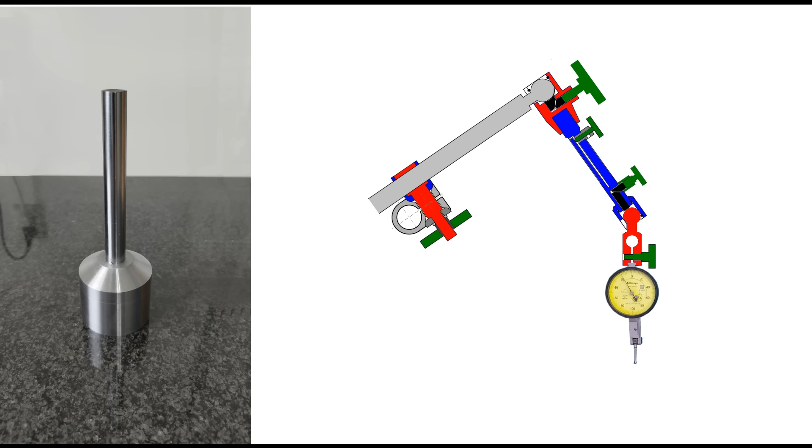In this video, I build the adjustable arms of the stand, using a human arm as an example. The shoulder, elbow, forearm and wrist are designed, calculated and made in this video. I hope you enjoy watching it and find inspiration in it.

This is the design for the shoulder joint. I'm going to make it from silver steel so that I can harden it later for extra strength and wear resistance. A threaded bolt extends through the two clamping blocks so that the block wings can be pulled together. I will later regret that this bolt fits into the blocks without any play.

My tiny tabletop bandsaw comes in so handy here. The machine has no trouble with this 40mm thick steel bar and neatly cuts smooth and straight slices and blocks. If you want to know more about this machine, watch the series about its construction on this channel.

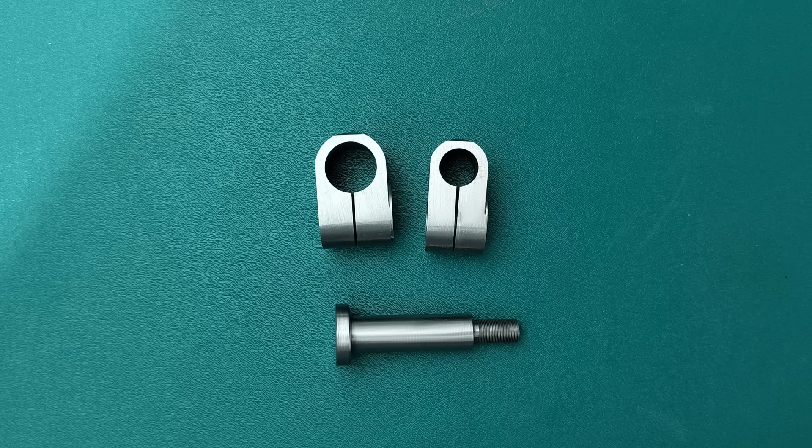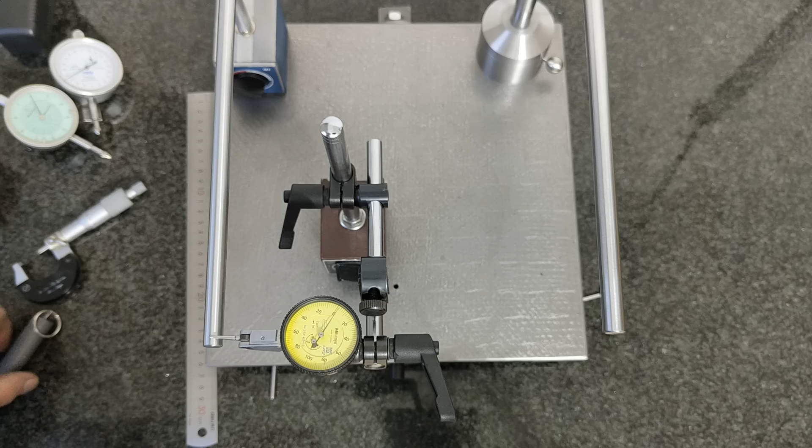And the parts for the shoulder, except for the large knob that I make off camera, are now ready. Let's first test whether this design is sufficiently rigid and allows smooth shoulder movement. This is the commercially available magnet stand. The deflection under the weight of 1/4 kilo is 400 micrometers.

And the deflection in my construction turns out to be 134 micrometers. A lot less, but I am anything but satisfied with this. The knob needs to be tightened much tighter than I expected with such a fine thread, and the flexibility of the shoulder joint is too great.

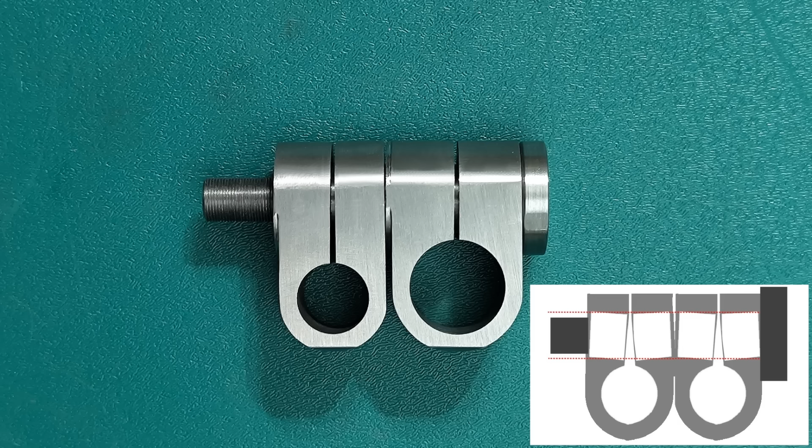Some thinking led me to realize that I had made a design error. The bolt fits through both clamps without any play, which means that the deformation in the clamps that will always occur when tightening will cause these clamps to become stuck around that bolt. I don't want to solve it simply by reducing the diameter of the bolt, because then I introduce unwanted play. I'm going to make a better shoulder joint.

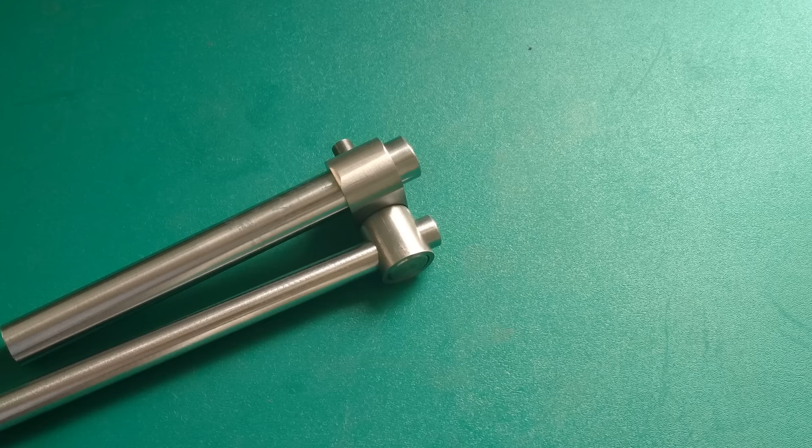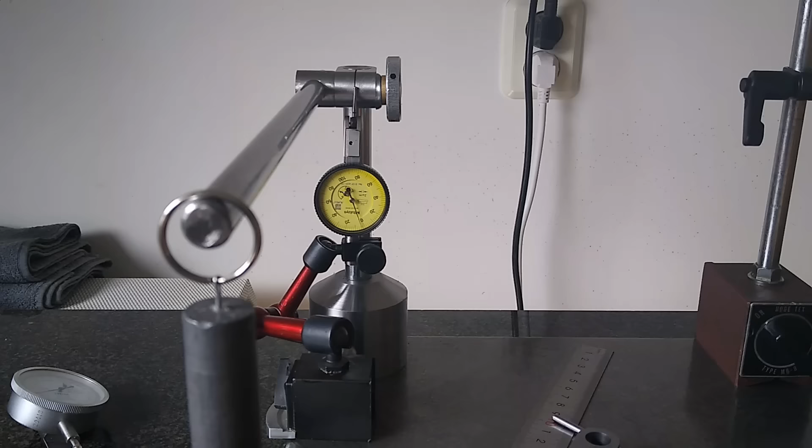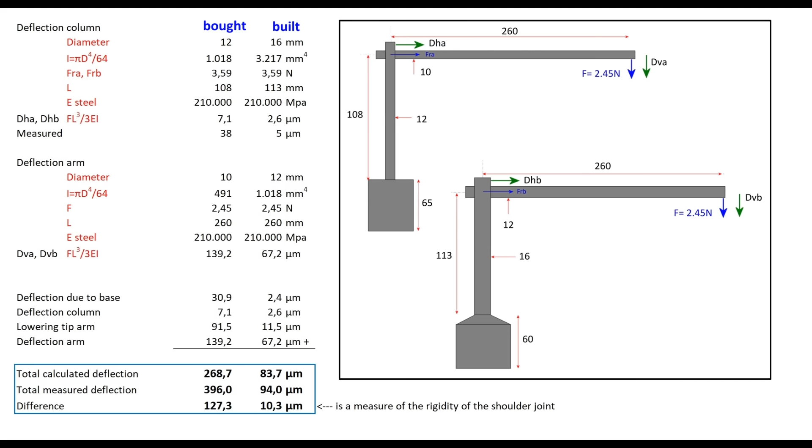This is much better. Not only has the deflection been reduced to 94 microns, a slight tightening of the knob is sufficient to properly lock the shoulder joint. Of course, I also did some calculations here, and that led to an estimate of the flexibility of that joint. At just over 10 microns, this is much better than the 127 microns in the commercial model.

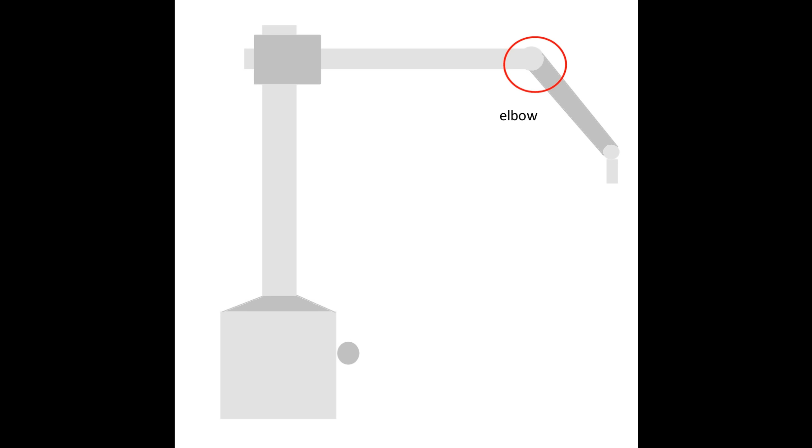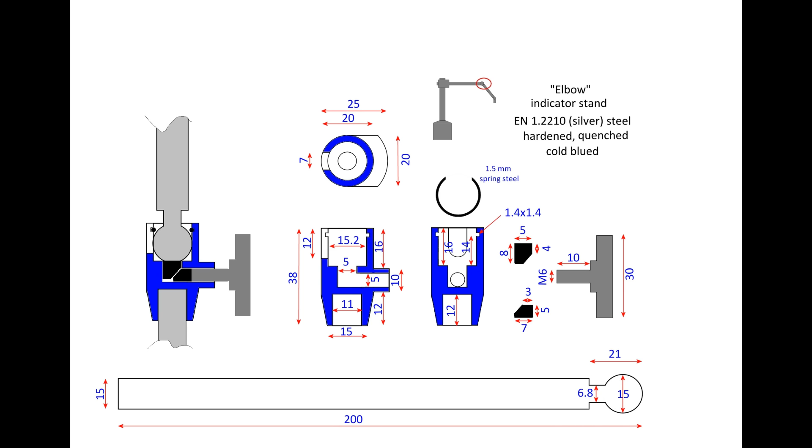For the design of the elbow, I used the commonly used ball head. By tightening a bolt, 2 clamping wedges are pressed very tightly against the hardened head, which in turn becomes clamped in a ring.

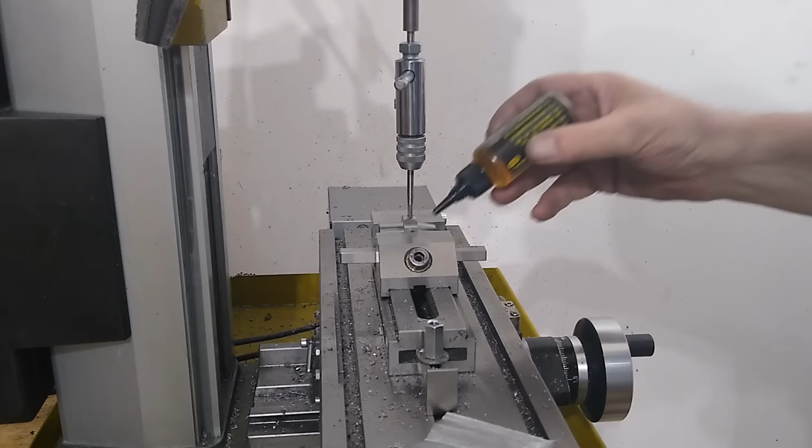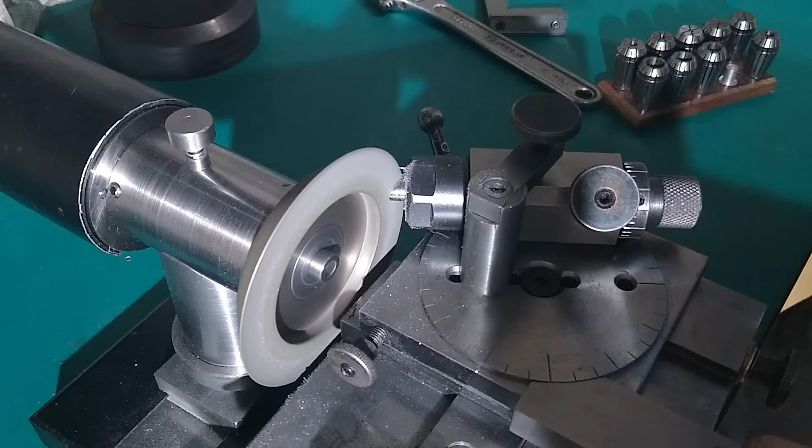On my to-do list, design and make a decent radius cutter tool. This is just junk. If you want to know more about this small grinding machine, see the series A Tiny Tool Grinder.

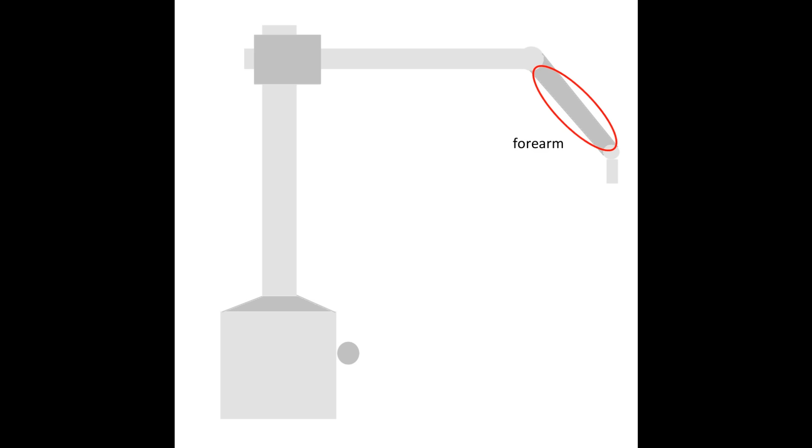To enable smooth fine-tuning, I first build a forearm. To maintain the biological analogy, I call the parts of the arm the radius and ulna. The two are pushed apart by a fine pitch screw. If both parts had the same cross-section, they would both deviate from each other by the same amount.

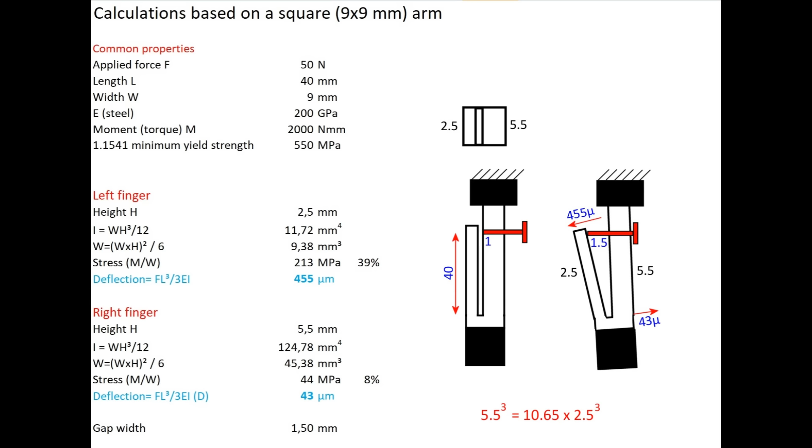By making one part slightly thicker than the other part, and allowing only this thick part to connect the elbow and wrist, I get the desired weakening of the displacement by about a factor of 10.

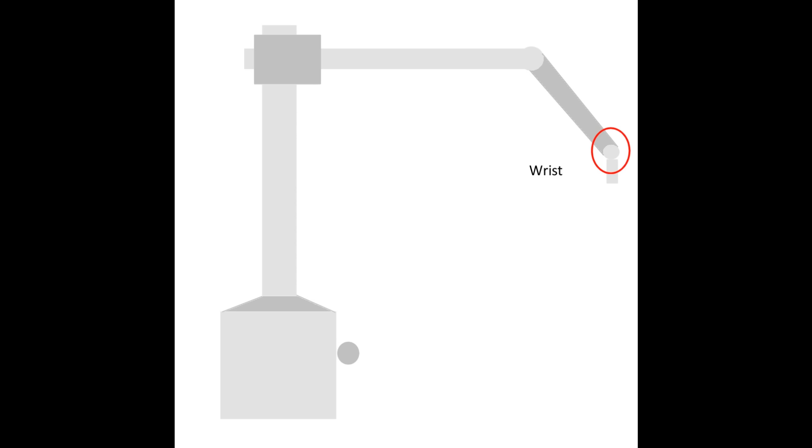For the wrist, I use the same principle as for the elbow, a ball head with a clamping device.

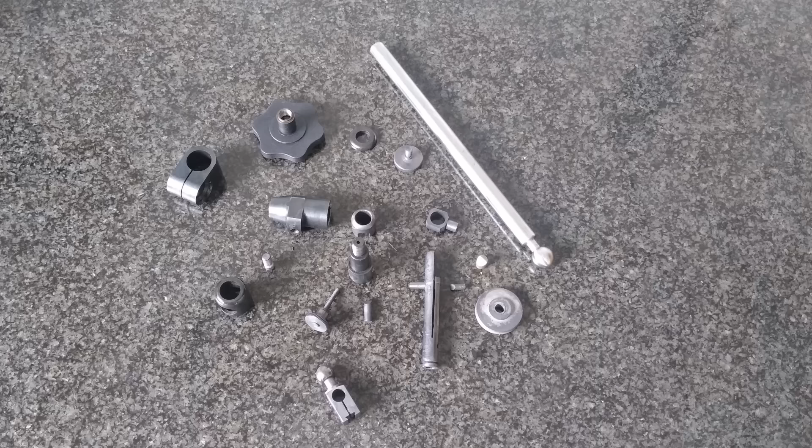All parts are finished. Most of it is made of silver steel and can soon be hardened and tempered, but some parts are made of mild steel. I will carburize, also known as case hardening, these parts in my electric oven. I just use aquarium carbon and sodium carbonate, which works well, clean and easy.

If you would like to know more about this and the hardness tester I built, view this series How Hard Can It Be? Here, under the microscope, the small pit that the tester's diamond has pressed into the material is visible. The length of the diagonal is a measure of hardness.

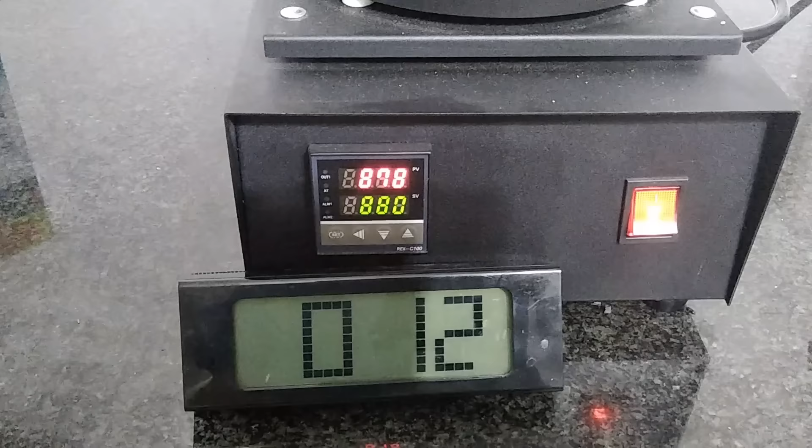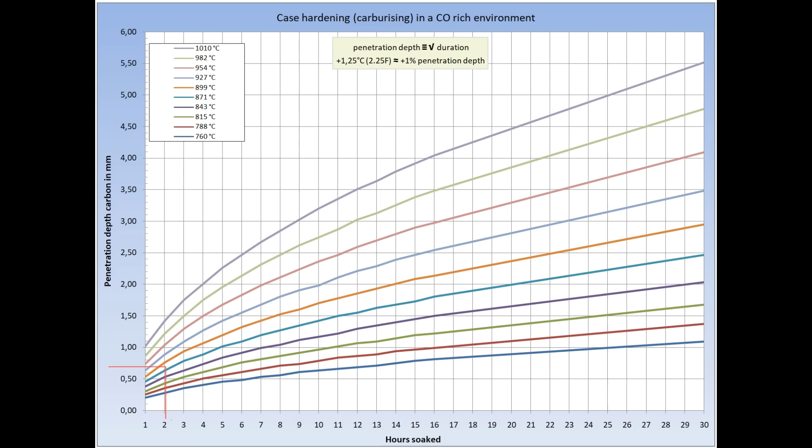I let the steel absorb carbon at a temperature of 880 degrees Celsius for 2 hours. This should lead to an outer shell, a case, of just over half a millimeter thick. That should be sufficient for a stronger and more wear-resistant surface.

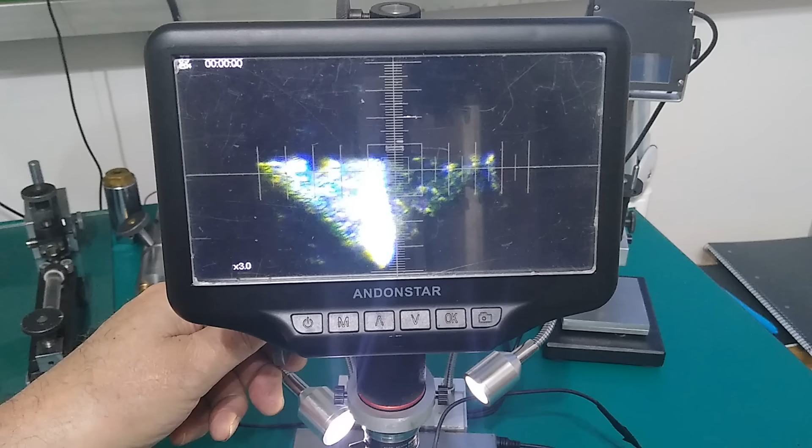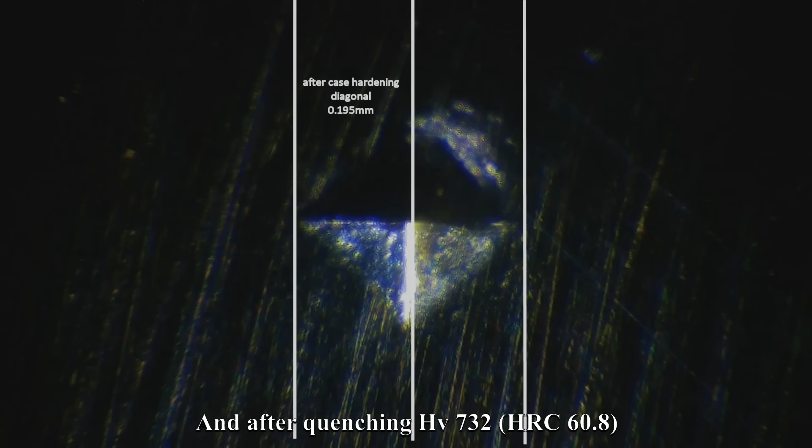The steel has become very hard after quenching. Too hard, because now also brittle. Tempering is the answer to that. After tempering the steel at 220 degrees for 2 hours, just on my electrical stove, the hardness has decreased somewhat to about 55 Rockwell C. Now the brittleness is gone, but the hardness is still there.

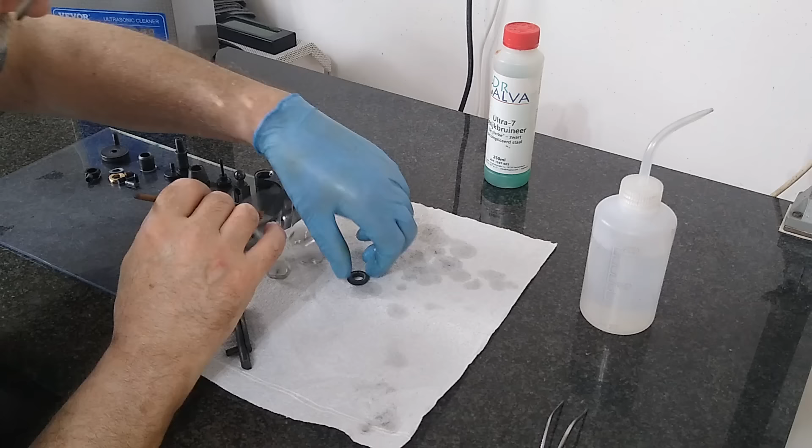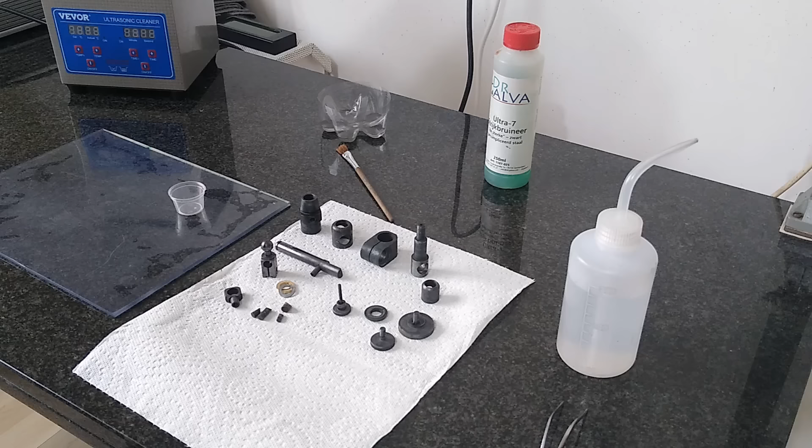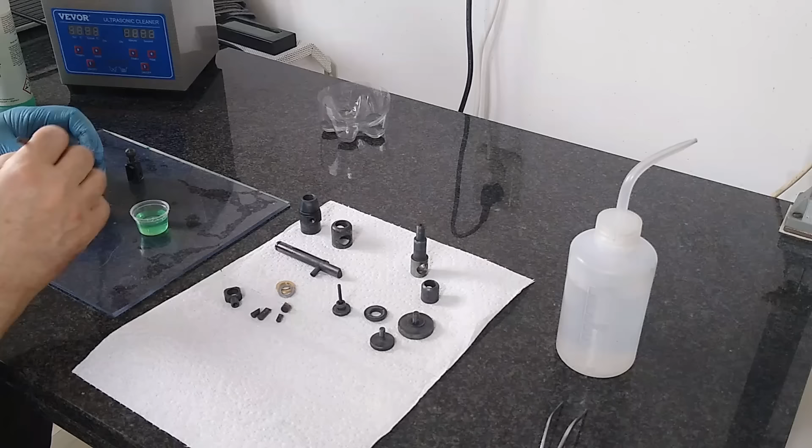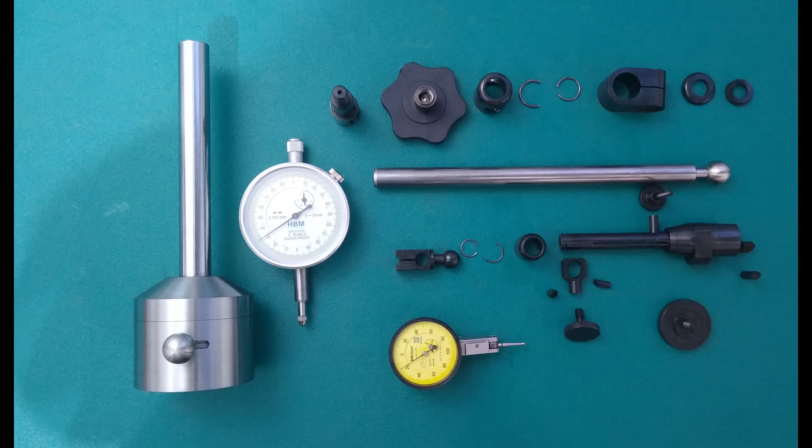After thoroughly cleaning the steel parts, I give them a cold bluing treatment and allow a layer of oil to penetrate the black surface. All parts are ready. Time for the best work, the assembly, and of course the final test.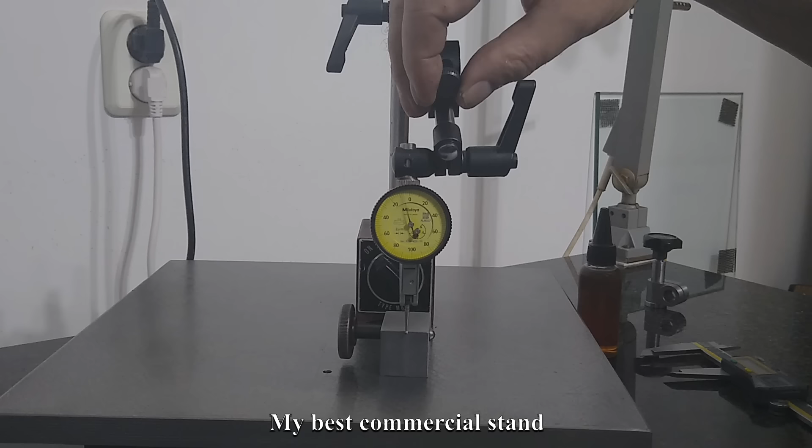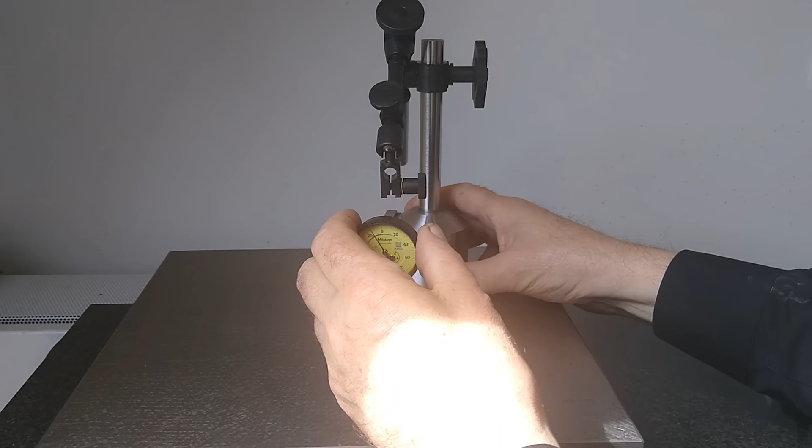The differences with the commercial model are significant. There is much more stability and adjustment is quite smooth, especially for such a slim adjustable magnet stand. If I compare that with all that annoying fiddling with that much too rough adjustment of an unstable arm in order to set it to 0, the progress is very good.

I do have some wishes when it comes to the design. The whole device works fine, but the arm could look more attractive and streamlined. Maybe something for the near future.